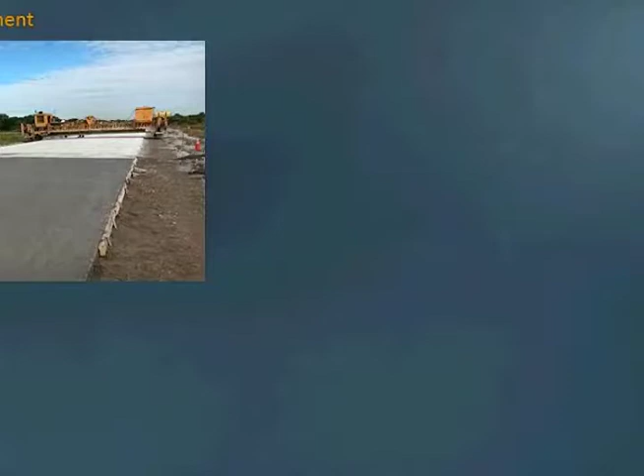As the title says, we are using structural fiber in thin concrete pavement or overlay. When we talk about thin concrete pavement or pavement on grade, we mean pavement directly constructed over an unstabilized base layer.

And when you talk about overlays, there can be different types: overlays on asphalt, on composite, or over concrete. When we say thin, we're talking thickness of around 3 to 6 inches, or maybe you could argue 6.5, bonded and unbonded. Fiber reinforced concrete is used for both.

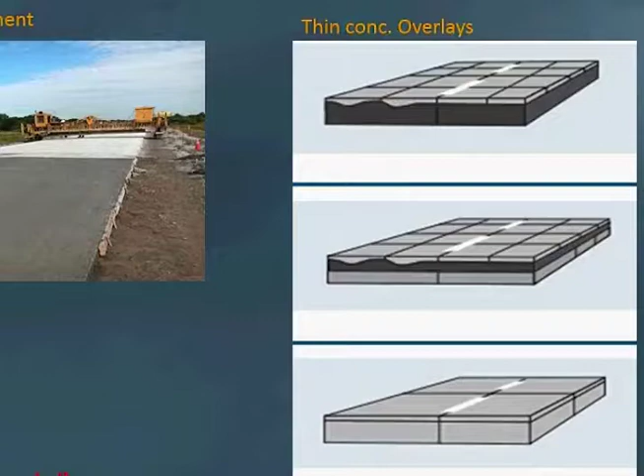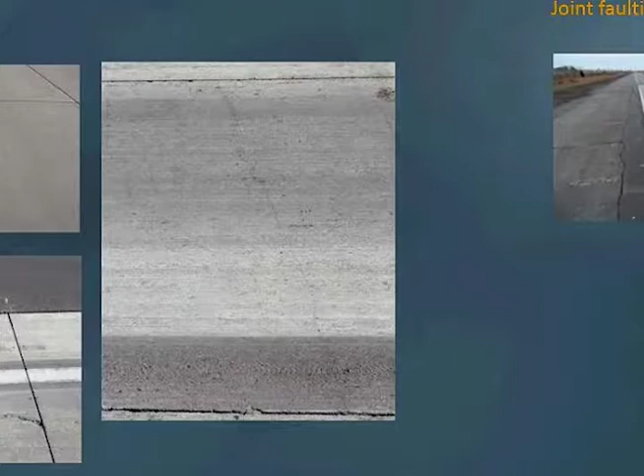What are the distresses we see? Different cracks. The picture at the top is an old picture from MnDOT, and the other two pictures are from recently constructed NRRA sections - I think cell 705 and 805. We can see joint faulting, which also occurs on thin concrete overlays or pavement.

Also slab migrations - this is one particular district. Illinois has seen this kind of slab migration. I think I got this picture from Randy, who was telling me that this kind of thing happens, but if they use fiber, they could probably reduce it. I was discussing it with Charles, and he agreed with me yesterday.

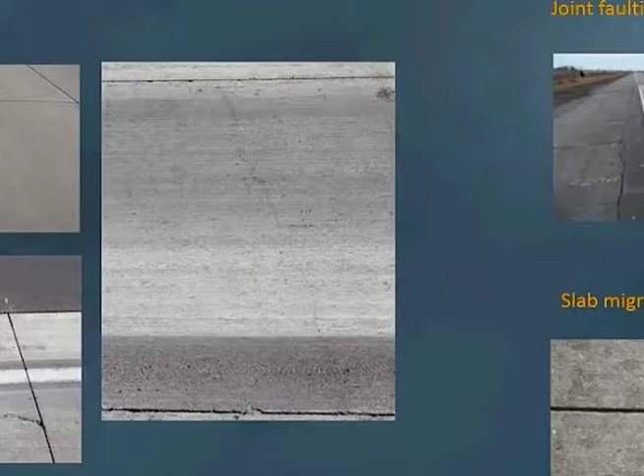When you talk about fibers, there are varieties of fibers in terms of material - steel fibers or synthetic fibers. Varieties of fibers have been used in many states of this country.

If we look at the benefits we get out of those fibers: it reduces crack initiation - the fibers sometimes help in that, but the main contribution is probably holding the cracks tight. Then it increases the load transfer efficiency. We'll see test results, including field test results, showing that fiber improves joint performance or load transfer efficiency. As we saw in the last picture with slab migration, fibers reduce slab thickness or can increase slab size.

I do not know yet, but if you use the BCOAME or ACPA design procedure, you can see that if you use fibers, thickness can be reduced in the design. The concept is that using fibers artificially increases the modulus of rupture of the concrete, and if you increase that, you can get a lower thickness. That's the theory inside those design procedures, but that may not be the proper contribution of the fiber, and you will agree with me today probably after these presentations.

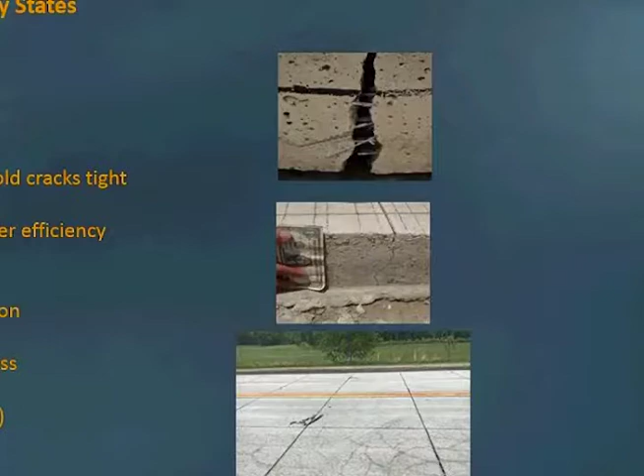In our study, as I said, we are working on two different projects. One is ending. In the first one, and also in the second, we asked people from different states to provide us data on fiber reinforced concrete overlays - how they perform, what kind of fiber they used, what doses they used. I didn't write many other states here, but I thought I'd make one slide so you can also read.

Here you can see these are the states that responded properly with numbers. If you look at a few things I put inside the blocks, we have 50 different projects, and out of those 50, only 6 projects were constructed with steel fibers - 6% - and 94% with structural synthetic.

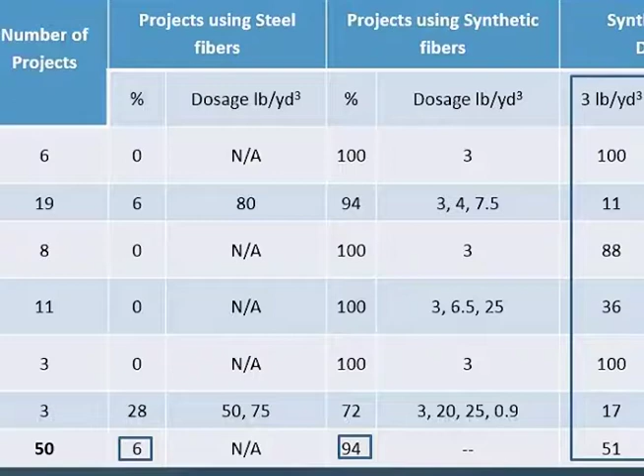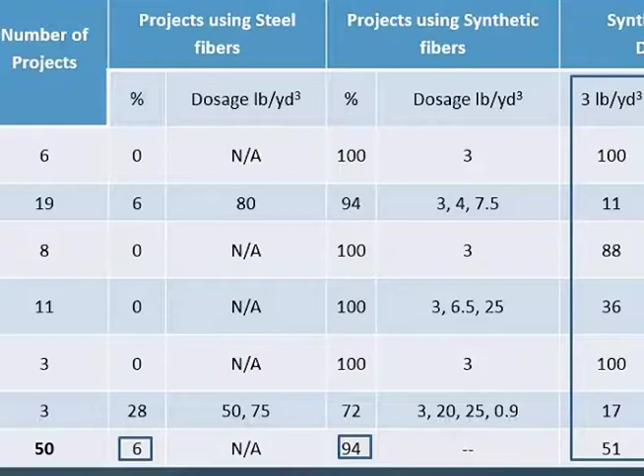We also asked what doses they used, and most responded 3 pounds per cubic yard. We asked how the dose was selected, but didn't get a conclusive answer - mostly things like 'the other state used 3 pounds, so that's what we used too.' Some responded according to the residual strength ratio criteria. We've used fibers and seen a lot of pictures of them performing, but we really don't know if 3 pounds per cubic yard is the optimum dose or not. So we investigated that a little bit too.

These are some pictures sent to us, or collected from published reports or papers. This picture from Illinois, the top one, Randy Riley sent to us, and we also got it in that report. It says this pavement is performing over its design life, even though it probably has some heavy truck traffic going over it. So it's really performing well.

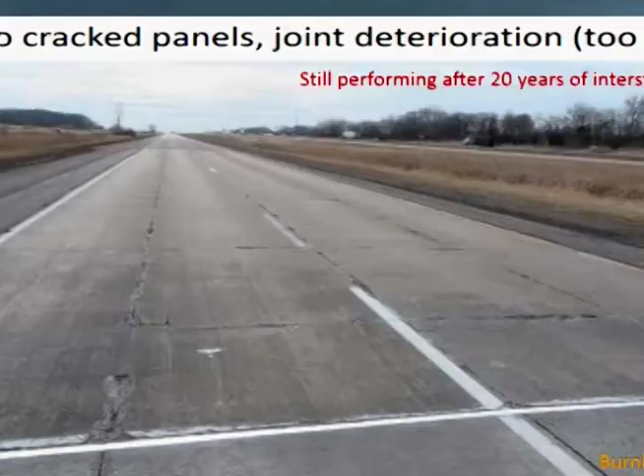Then we got some pictures where they have not used fibers, showing slab migrations. In MnROAD cell 96, I have seen it still performing. Yesterday I saw it, and right now it has a layer of seal coat over it - Tom said that's because of the safety design, and they provided that. The joints got deteriorated, but it's still offering service. This one was having fibers too, and that's a good thing - fibers are really contributing.

This is a picture I got from South Carolina. The gentleman says this crack you see here - it's a 4-inch thick concrete overlay, 3 feet by 3 feet panels - and he mentioned this overlay also cracked really early in its life, but the pavement is still performing. They constructed it in 1999 - we'll be going to 2019 next year, so it's pretty much 19-20 years this pavement has been performing. He told us the fiber is probably keeping the pieces together, so the cracked, shattered surface has been serving for 17 years.

Fibers are helping. We got this picture from John - I think you probably shared this one. I did not put it in inverted commas because I probably changed it a little bit, not the fact but the presentation's perspective - I changed something like that.

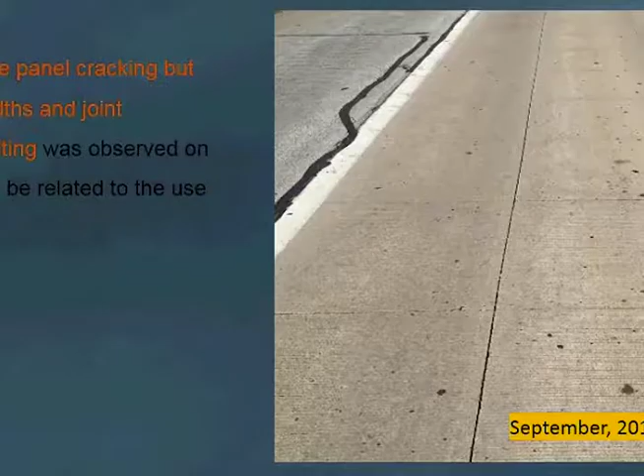We have evidence fiber helps, and this slide shows what different states say. Illinois says it reduced slab migration, joint separation, and faulting. Kansas saw less faulting. They say the fiber doesn't fall out too much because fiber holds the pieces. In Minnesota, we'll see some graphs showing increased load transfer. Missouri restricted faulting and reduced crack width. South Carolina said increased service life. Virginia says fibers exhibited good resiliency in minimizing cracking and crack width.

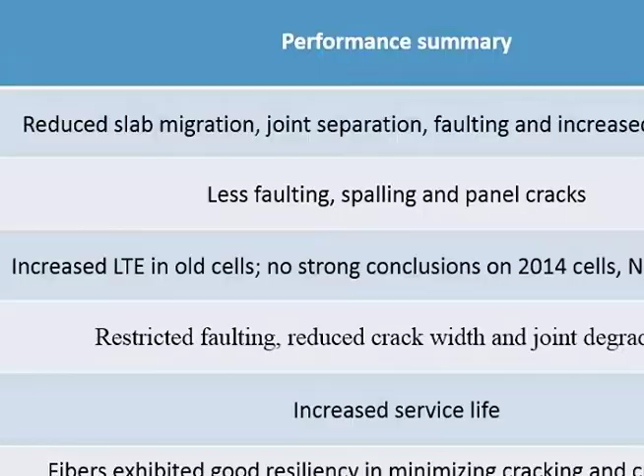Now we know that fibers are contributing. That's the fact I'll say right now. And we have also seen that people use 3 pounds per cubic yard of fibers.

Now is that good? Not necessarily. Can we look a little bit in an engineering or mechanistic way to optimize the quantity of fiber, or determine what fiber is good, and what particular properties we should be looking at?

If we know that, the next question is how do you quantify the fiber's benefit and appropriately incorporate it into the structural design? Right now in structural design we artificially increase the modulus of rupture. But you will agree with me, modulus of rupture is not always increased by using fibers. You will see that.

So the design procedure we are having right now is kind of artificial as far as fiber reinforced concrete is concerned. We do have a really good amount of performance data right now from different parts of the country, and plenty of laboratory research data available at University of Pittsburgh.

Jeff Roesler has a lot of data. Amanda has data. We currently produce a lot of laboratory data ourselves. And of course MnROAD is a great resource with all types of data—since 1997 they have collected data on fiber reinforced concrete pavements. And of course there are numerical models. So all these things are actually available, and with a little more effort this can actually go into the design procedure.

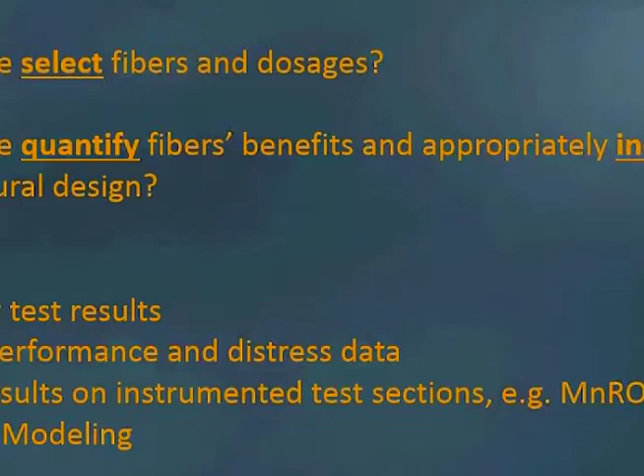So this is the current status. Now, what we have done a little—I covered some literature and what we are actually doing in our laboratory study, this is just an introduction. We reviewed what other people are using, what parameters of the fibers they are looking at.

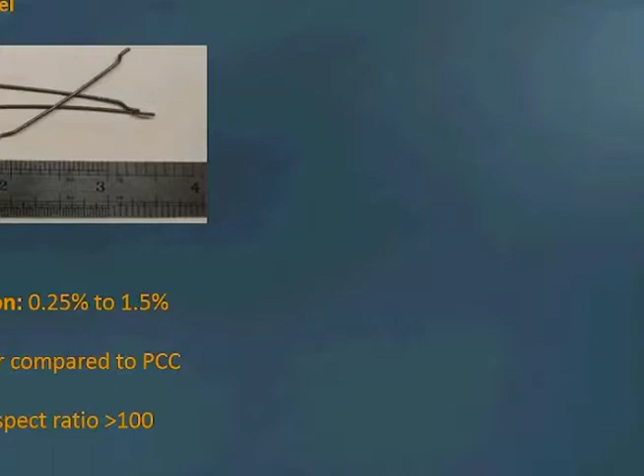We saw typical volume fractions used in both laboratory and field studies—people use from 0.25 to 1.5% volume fraction. When I say volume fraction, it's the volume of fibers with respect to the volume of the concrete. A lot of literature says if we add fibers, the slump goes down, and fiber balling can occur. So these are the typical volume fraction ranges suggested in laboratory studies or applications.

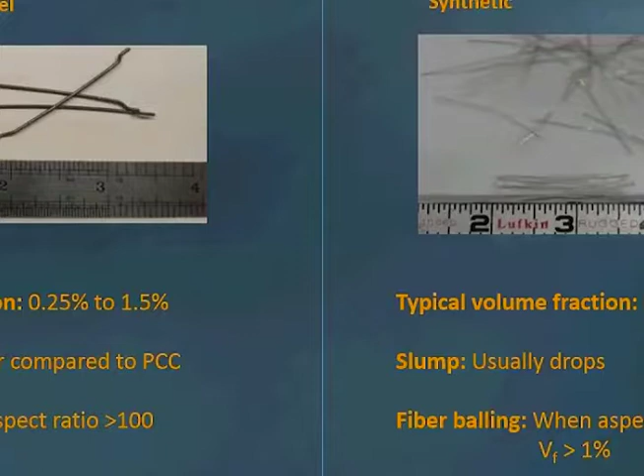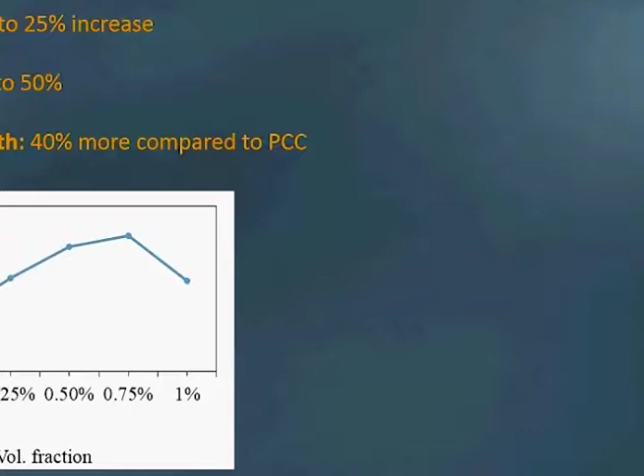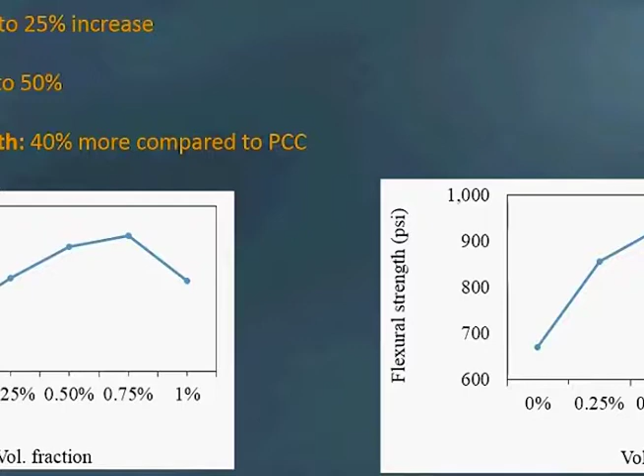In steel fibers, even though they were not used in too many states, a few examples exist, like in Illinois. Steel fibers sometimes help increase compressive strength—you can see the compressive strength increases, but if you add too much it doesn't help, because only a few particular fibers end up oriented vertically or horizontally, and a lot depends on mechanical orientation too. Sometimes we screw up if we pour too much fiber. Flexural strength can also increase if we add steel fibers—one study I referred to said it can increase by 40%.

Now, since this country prefers synthetic fibers, I'm focusing more on synthetic fibers. With steel fibers we saw we can increase the modulus of rupture or compressive strength, but with synthetic fibers, we really cannot—we cannot even increase the modulus of rupture. Now give a pause and think for five seconds: the current design procedure says let's increase the modulus of rupture by 20%, but we are using synthetic fiber that does not increase the modulus of rupture at all. So we need to look at this.

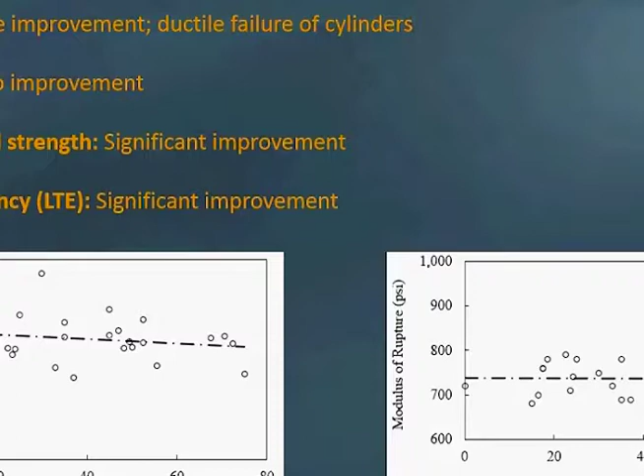Here is the thing which is important: how fibers, synthetic fibers or steel fibers, perform. These three graphs show one for no fiber, then 0.5% volume fraction synthetic fiber, and then 0.5% volume fraction steel fibers.

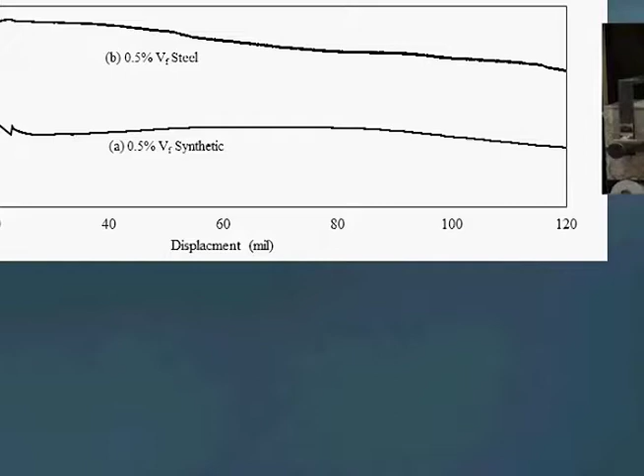Steel fibers perform better than synthetic fiber, but we don't typically use them because they're heavy and cause construction issues. If we use synthetic fibers, the required performance is probably good enough. Synthetic fibers can serve our need. So this is the contribution, not to the modulus of rupture or compressive strength.

We can increase the residual strength. We did a laboratory study with 11 different fibers, one of which was steel. I'm missing one here, 10. I did not include the steel fiber here because I wanted to focus today on synthetic fiber, so we have 10, but I've deleted the steel one.

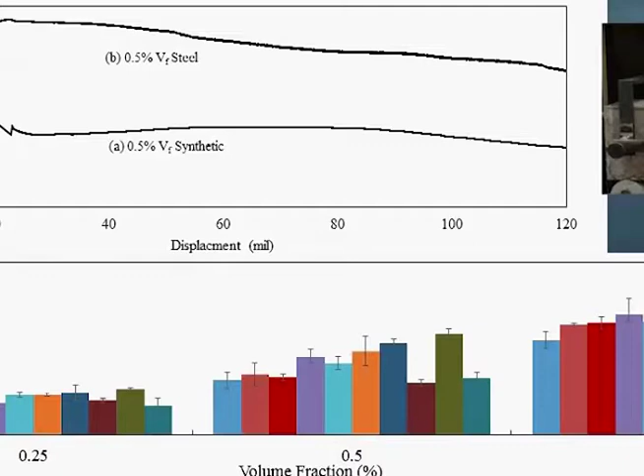As you increase the percentage of the volume, the residual strength ratio increases. We can also get residual strength ratio, which we popularly call it, and probably all of us are familiar with that. If we run this kind of test, called ASTM C1609 test...

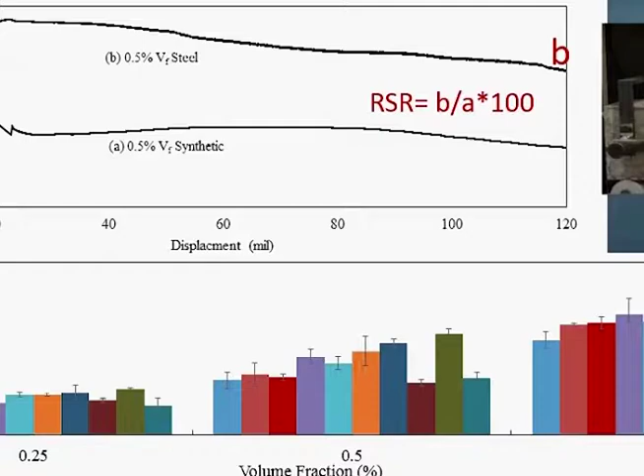Under this test, we apply a displacement-controlled load and get a peak load. Because of the fiber, the load does not go down to zero, rather it sustains some load. We measure the load at 120 mils displacement, divide it by the peak load, and get the residual strength ratio. That increases with the fiber, not the modulus of rupture.

So we developed some correlations. If we are forward looking and want to include fibers into the design procedure, this kind of information will be helpful.

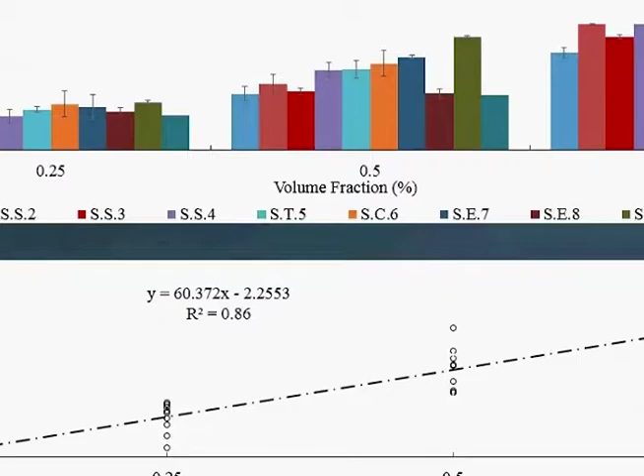We generated different correlations with fiber volumes. The most important thing, I guess, out of all the slides that I have shown, this is the most important one.

With 10 different synthetic fibers, we had varieties - some straight, some crimped, embossed, twisted, low stiffness, high stiffness. Among those, if we used embossed or slightly stiffer fibers, we get more residual strength ratio with less quantity of fiber compared to this one.

If we use straight synthetic fiber, we have to add 50% more fiber in order to get 20% residual strength ratio. Yesterday when Brett was presenting, we saw the mixture design for the MnROAD cells, like in order to get 30% residual strength ratio, how much fiber we had to add. If we had different types of fibers, we probably wouldn't need that much fiber.

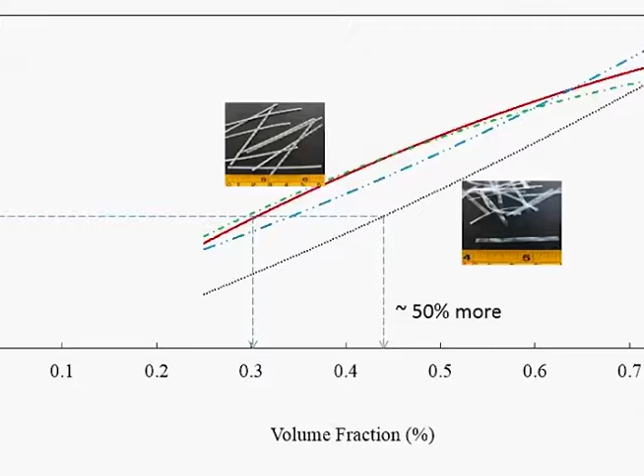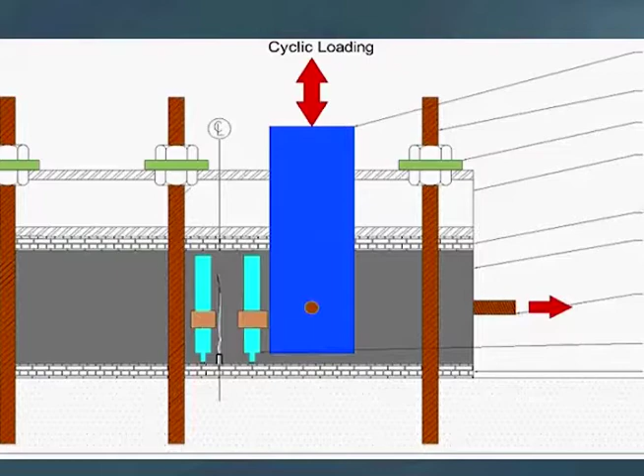So this is one important thing. Then we conducted the load transfer test. In this test, we have a beam, apply load on one side, and measure the displacement on both sides of the beam. It's a dynamic test.

These are some different pictures, and it looks like this. This can give the load transfer efficiency. It's a laboratory method. If we run this test, we get some profile like this.

The very first one you see at the crack is 16 mils, then 47 mils, and 126 mils. As you go in the right direction, you can see the displacement under the loaded side increases, or the displacement under the unloaded side drops, when load transfer efficiency decreases.

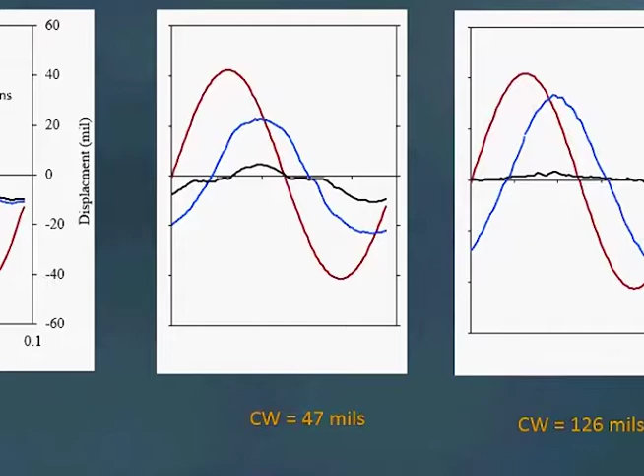These test procedures can give us these kinds of results. A lot of other results we can find out too, but I'm not spending time on that. What I wanted to tell you is this is a good procedure to find out the load transfer efficiency of the concrete.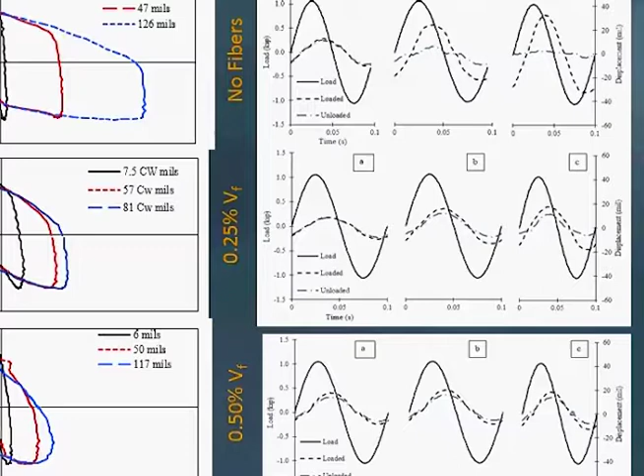If we use fibers, the very top one shows for no fibers, then 0.25 volume fraction, and then 0.5 volume fraction. You can see the difference.

We correlated this with the slab test results at University of Pittsburgh. We had done this kind of test on the slab and then correlated it. The hollow circles are for slab and the other one is for the beam.

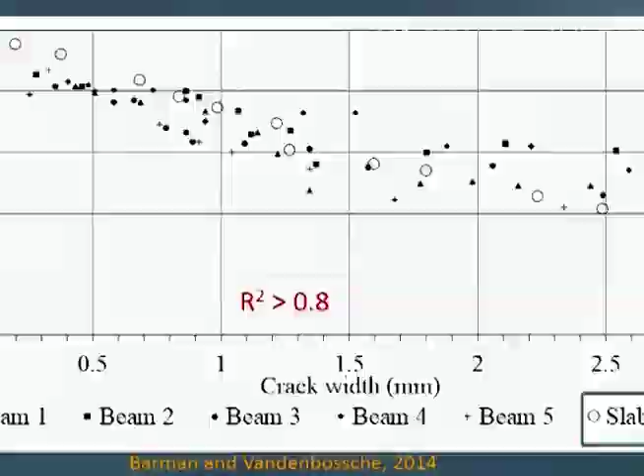So this is a good method to test the residual strength ratio. We performed this test on, I think, 5 different types of fibers. We selected S for synthetic, straight twisted, straight crimped, straight embossed. So we included different types of fibers.

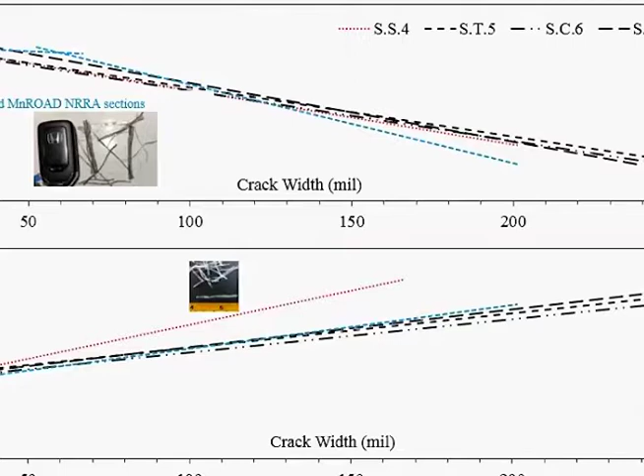In terms of load transfer efficiency with respect to crack width, the fiber we used didn't give too much of a difference, but that's the important thing. Sometimes load transfer efficiency can be misleading. Here you see one particular type of fiber, the straight synthetic one, gave more displacement. Even though load transfer efficiency was good, that means if we apply the load, both slabs go down more. That's not good, right? So we'll have to be really selective and choose good fibers.

So we've extended these results to find out. In general, you see here this curve is for plain concrete, then 0.25 and then 0.5. So if we use fibers, how much additional load transfer we can get from this correlation. This is the relation for the loaded side displacement. So if we want to use fiber and the DOT or the agency decides they want 20% additional load transfer, or maybe 30%, we can look at this kind of correlation and find out what dose we want.

One important thing here, in fiber concrete thin overlays, we do not provide dowel bars - sometimes we do, but most of the time we don't. So when you talk load transfer, it's very important to mention at what crack width you are testing. Because in conventional concrete with dowel bars, load transfer sensitivity with respect to crack width is not that much, but for this one it is. So when comparing load transfer for fiber reinforced concrete, we should look at what crack width we are talking about. If we're comparing two joints and the crack widths are different, then we're not comparing apple to apple.

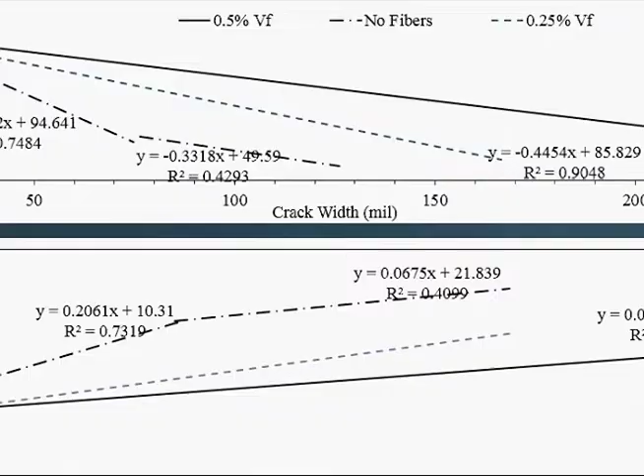So we actually developed this kind of nomograph. If you know Jeff Roesler's study, they are more focused on residual strength, so for a particular road section you're looking at 175 or 150 residual strength. So how much fiber you want to use, what type of fiber, you can get that. And if Minnesota DOT says we also want this much percentage of load transfer efficiency for that crack width, this kind of nomogram is helpful.

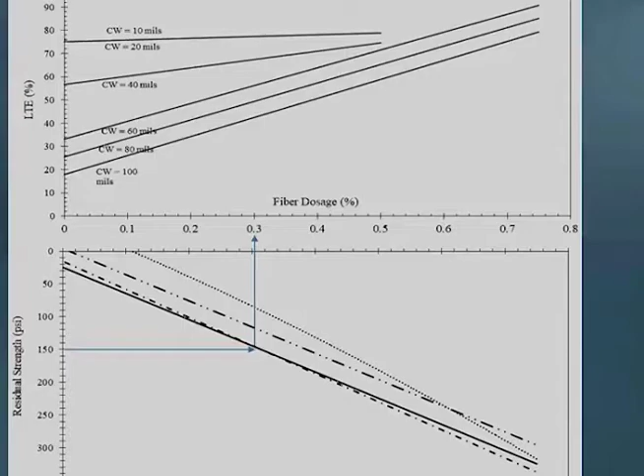All those results I'm showing can be helpful in evaluating the contribution of the structural fiber. One more important thing we noticed: fibers are good, synthetic fibers are good, but there is something called stress relaxation. If the crack width increases, fibers get some plastic deformation. So coming summer, when the crack width becomes narrow, the fiber doesn't contribute if they are not stressed. That's something we should also be looking at.

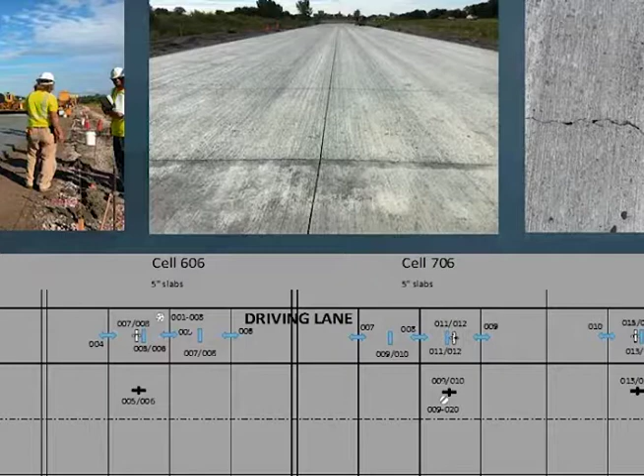Alright, so a few slides from the field, not a lot of slides. Those were some laboratory studies - there are other laboratory studies available too. So here's the field study. I think Brett has done a great job introducing all those in his presentation yesterday - all those cells that were constructed with different fiber compositions, different slab thickness, different slab sizes.

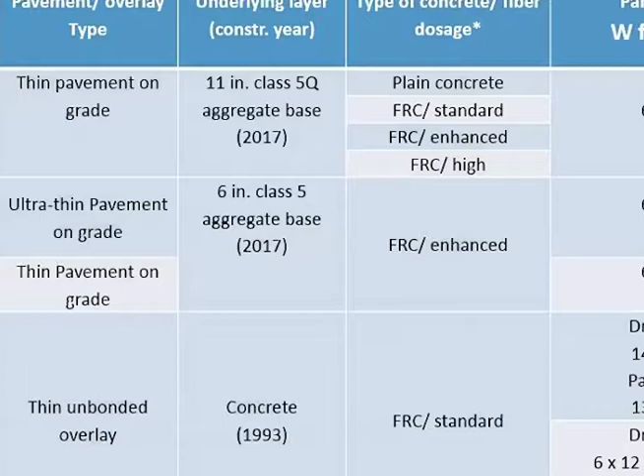I'm just looking at these last three boxes. Hopefully we'll be able to get some good results and then move forward - how can we take the effect of fibers in fatigue modeling, faulting modeling, or how we can modify or increase the panel size.

So we had different tasks, and task one was literature review - we have completed that, the report is available online. Other tasks basically looking at performance analysis and then working towards developing some procedures so that we can use in the future design procedure.

So Ben has given me some data on those active MnROAD cells, new ones. The very left one is the control. We did not see a great amount of load transfer increase, but 10% in general, irrespective of the fiber doses.

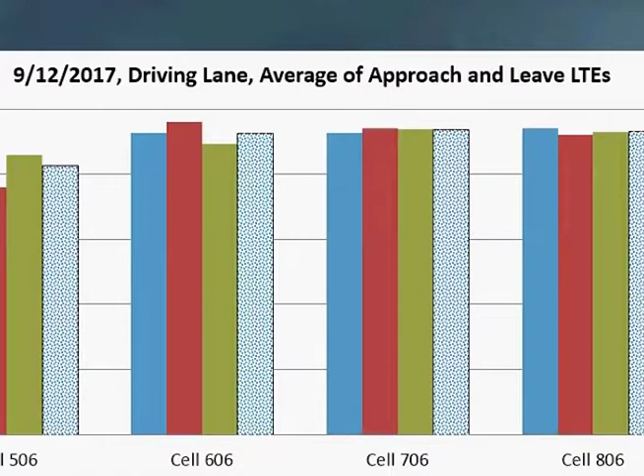But you see the consistency in the fiber cells is kind of consistent. There are 4 lines here; the first 3 are 3 different joints, and the last one is the average.

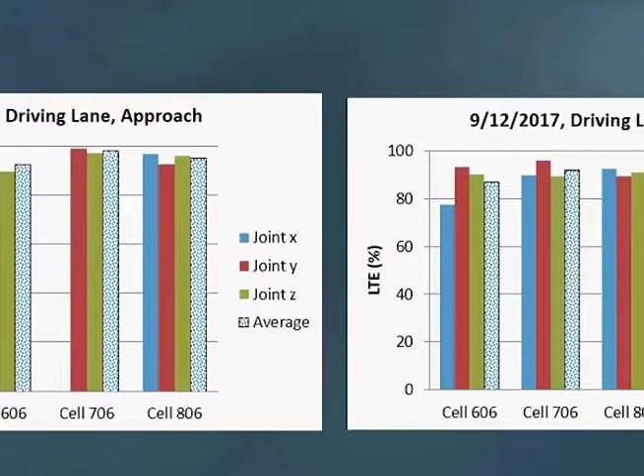When we separated that at approach slab and leave slab, you can see on the control side there is one with 59% LTE.

We also analyzed those data for the loaded side displacement. Here you can see inconsistency.

I don't know for any reason cell number 606... oh yeah, cell number 606 was 1 inch thicker. That tells me the reason now. It was 1 inch thicker so it did not get too much displacement, and that explains what I was looking for.

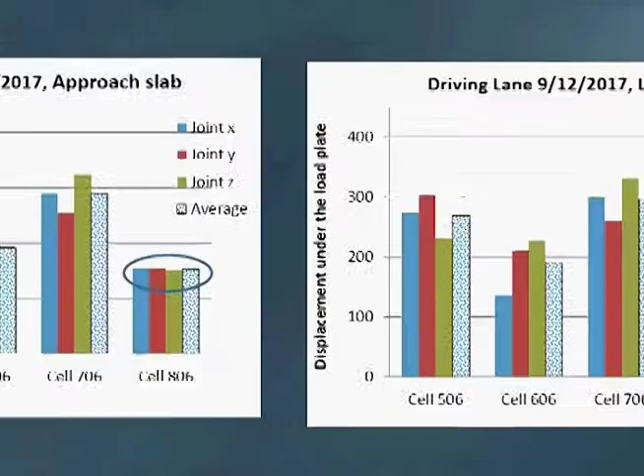Alright, so you see the consistency in here. If we use fibers, something is happening. Now if I compare this with different crack width or different time, we will get more information.

I'd be really glad if we can get these kinds of results for those new sections, because when we consider the fiber's contribution in the design procedure, the fatigue consumption of the overlay will be different in different seasons. If we know the crack width, we can use them in the faulting model. That would be really great.

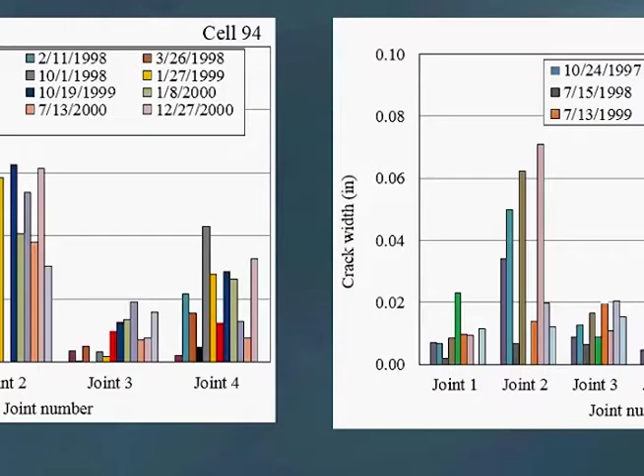So the concluding remarks: we know structural fibers are contributing and we have the evidence. Synthetic fibers are mostly used. We saw straight fibers are not as great compared to the others. Fibers can improve the load transfer efficiency—say 20%—but we'll have to see more results from the MnROAD sections.

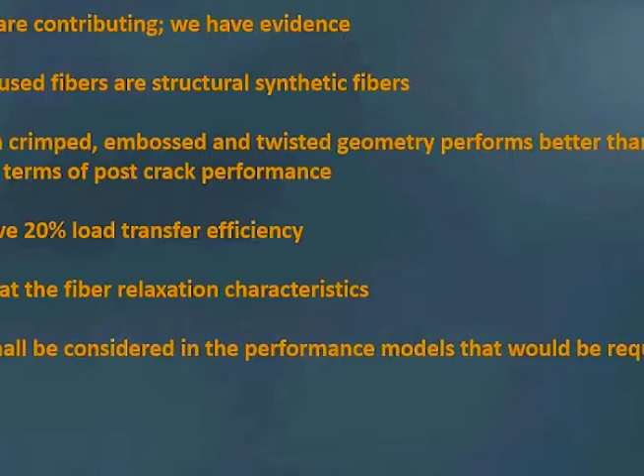Now at the end, I'll just say these are the benefits, not the modulus of rupture. I hope this NRRA project will give us a chance to consider the contribution of fibers more mechanistically or more appropriately. I'm looking forward to this project—hopefully we can get something.

So these are some pictures I got from Tom. I remember once Matt Zeller told me, if a pavement cell gets distress in the MnROAD, it's kind of a blessing—it's not. So we already got some cracks.

Now we'll have to see if fibers can help maintain this, or if we get wider cracks or something. We'll have to see. Okay, so I'm open to any questions.

Yes, sir, I have a question. Some of your earlier slides said that the deterioration at the joint was basically because there were too many fibers in the joint. Was this because you had to add additional water to the mix to get workability, or what was going on—freeze-thaw damage, or what was causing this issue?

I'll answer that question, but the expert is here—Tom can definitely give a better answer than me. What I suspect is that particular cell was having 25 pounds per cubic yard of fiber, compared to 3 pounds per cubic yard typically. So too much fiber probably occupied the space of the aggregates, which basically participate in load transfer. That's one thing, but I'd also say spalling happened because of the fibers—instead of holding the pieces together. Imagine a bunch of fibers at one place; it doesn't have aggregate or mortar paste around it. So I believe it's that kind of thing, but if you have a better answer than this...

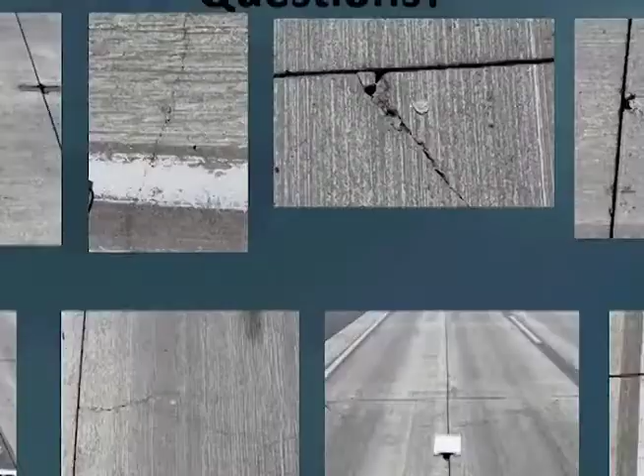I mean, you mentioned you really like something that maybe is more elastomeric, right? The problem with all these synthetic fibers is they've been stretched to the edge of their elastic behavior. You grab those and stretch them just a little bit more, and they'll fail brittly. Yeah, I agree with you, and that is the reason I put that in, and that's what you are probably talking about. So I completely agree.

We'll have to take care of this one. There aren't any elastomers on the market today that are polymeric fibers. They're all polypropylene stretched to its alignment. These polymer chains are so highly aligned now that you just do the littlest bit more strain to them and they just snap, right? So the whole functional mechanism here is just tortuous pull-out.

Yes, but what I'm telling you is, even though it does, I think still like 50, 60 mils or even 70 mils, if you stretch it up to that much, you're still having a plastic deformation. You can still have some contribution. You might not be having like a 30% load increase, but you still have something. But if all the joints are not deployed, and all of a sudden one crack is like half an inch wide, then that joint needs a full depth replacement, I think.